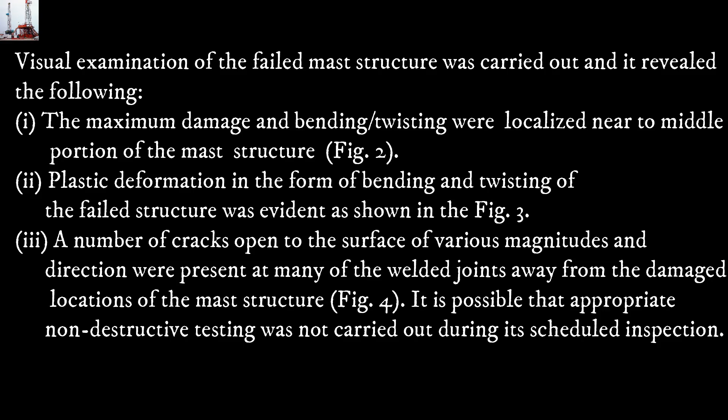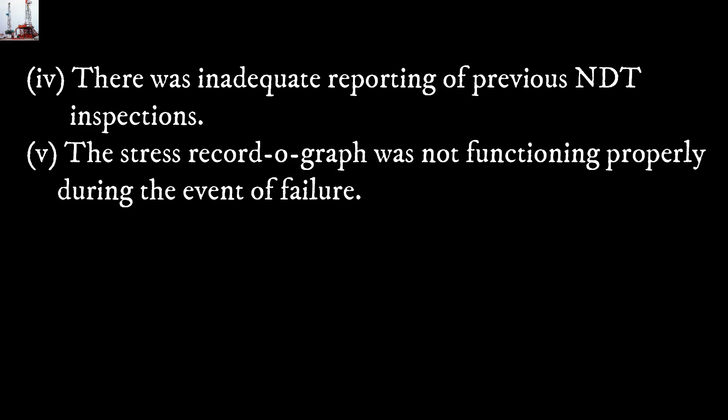Fig. 3. III. A number of cracks open to the surface of various magnitudes and direction were present at many of the welded joints away from the damaged locations of the mast structure, Fig. 4. It is possible that appropriate non-destructive testing was not carried out during its scheduled inspection. IV. There was inadequate reporting of previous NDT inspections. V. The stress recordograph was not functioning properly during the event of failure.

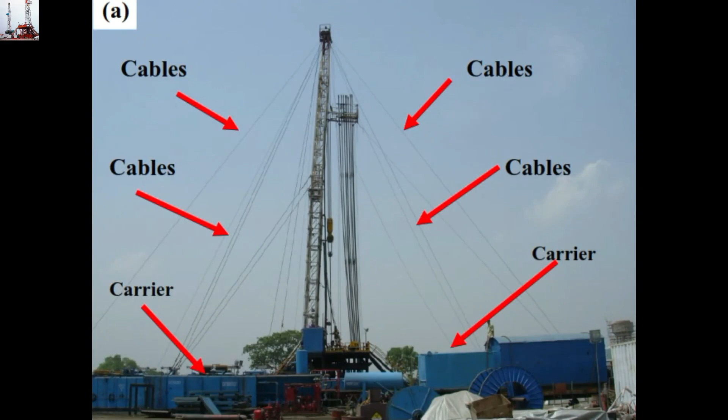Results and discussion. Metallographic analysis of the damaged and undamaged region revealed a microstructure consisting of pearlite and Widmanstätten ferrite, Fig. 5. There was no abnormal material degradation in the damaged location of the failed mast structure. A thorough examination of the fracture surfaces, Fig. 6, revealed a texture indicative of cleavage-type cracking with riverline patterns at places along with ductile voids around the vicinity.

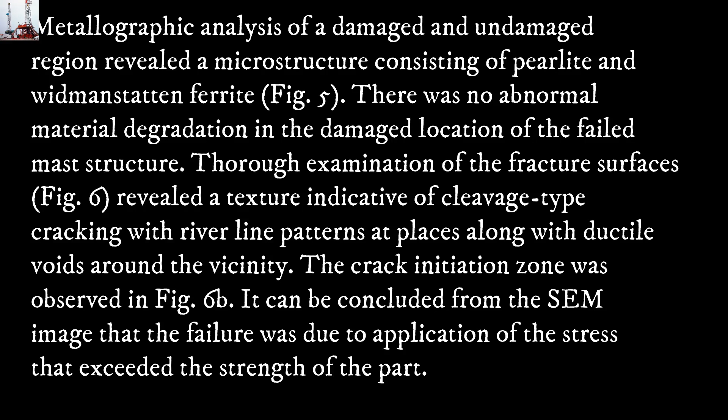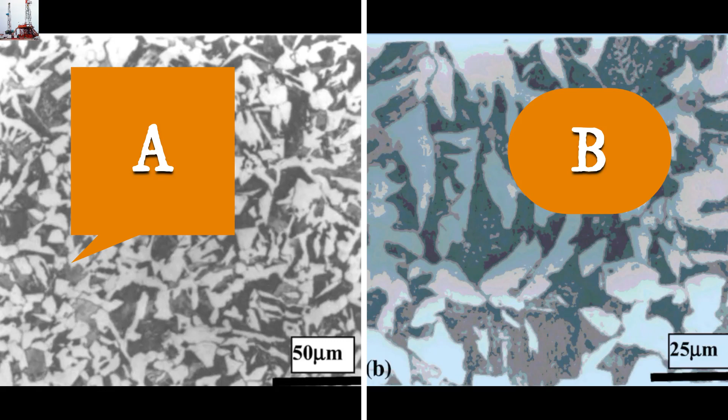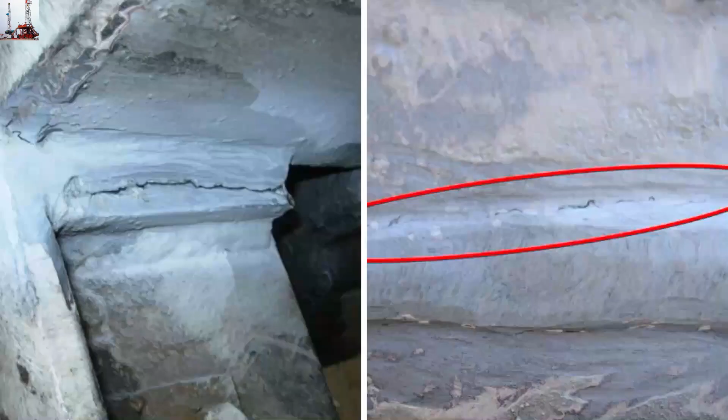Fig. 4. Magnetic particle examination revealed the presence of cracks in the weld joints at many locations of the undamaged part of the mast structure. 5 different configurations have been analyzed to examine the possibility of failure of any member of the structure or anchoring cable. All the configurations have been analyzed for 160-ton load on the mast structure.

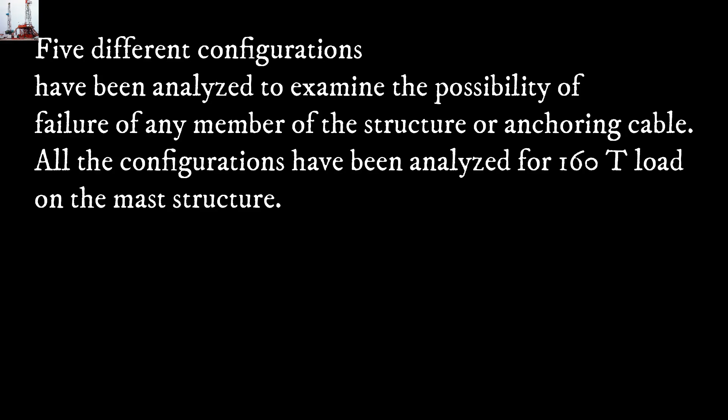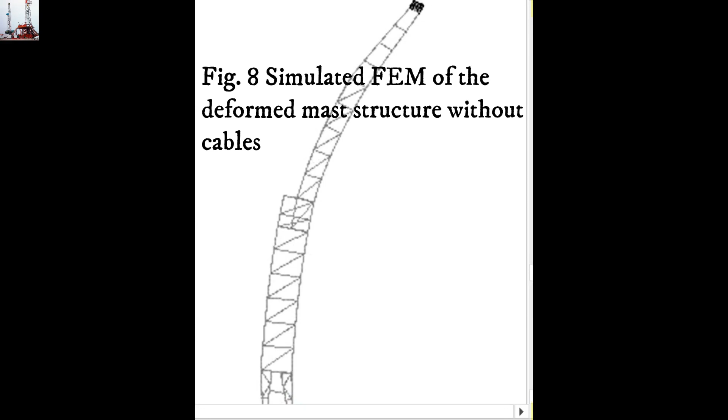Conclusions. Based on the findings of this investigation, it is concluded that the non-functioning recordometer did not provide adequate warning that the load applied to the mast was at dangerous levels. This ultimately led to rapid increase in operating load. One or more of the cables or the anchoring points did not have sufficient strength to withstand the rapid increase in operating load exerted due to the sudden additional pull.

One or two anchoring cables at the top failed first. Thereafter, stress between the lower and upper parts of the mast structure was beyond the yield strength and the mast deformed plastically, failing under its own weight.